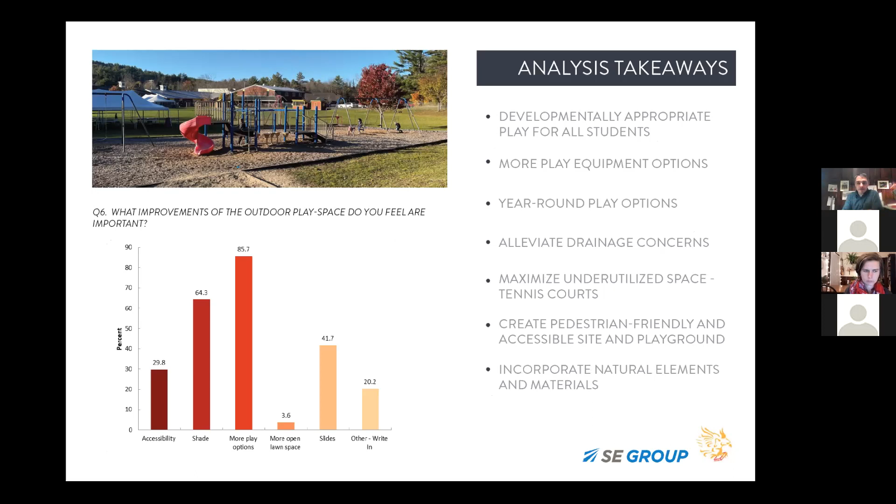As we started transitioning out of the analysis phase and thinking about the concepts and what sort of theme or story would organize the concepts on the site and really create some strong undertones, we started looking at what inspiration we could dig into.

This kind of classic valley and rolling hill landscape, of which Grantham sits at the base in a valley where the brooks and streams are flowing in between some hills. So we have this valley landscape as one inspiration piece.

And then the idea of all the hiking available within New Hampshire and even on the property with the trails, and the idea that hiking is very much about a journey and getting to a summit in many cases. And then even thinking about industry, how all the mills and the historic lumber industry in the town and area could lead to some of the form and materials that we see.

And then finally, within the valleys, the idea of open fields and rolling hills and ways to use that as an inspiration for some of the formation of the overall site design. So that's where we were drawing some of our inspiration from.

And then from there we say, all right, how can we translate that into a vision for what this play area and play space will be? And so we have the idea of modern organic forms, whether it's linear strong axes or softer curving formations, offsetting lawn areas with mounds and grasses, as well as the idea of using lots of wood.

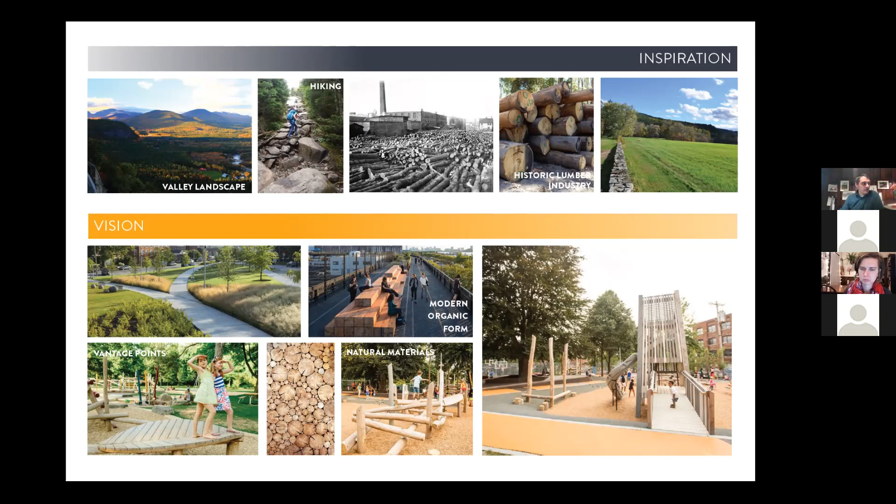When I switch slides, is there any delay, or are we keeping up pretty well? Looking at you, Elena. We're good. All right, I know the last time things lagged a little bit.

All right, so concept A. This is our first concept, and really the idea with this one, and you may remember that I touched on the idea of permaculture at the analysis,

is the idea that closer to the school is where you have more of your core intensive uses, and that as you get further away, the uses start to get less intense, and it's places you may not go to as frequently or for as important a reason.

And so the overall idea with this one is, all right, let's create this hive of activity. Really, as you're coming up Learning Drive and coming at the entry, using this tower piece in this upper playground as an icon of the entry into the school. So you see this tower right at the entrance to the school.

And so that becomes the foundation of this plan, where the various active playground play activities are located, basically in the cup of the school architecture. And given the way the sun comes up in the east and rotates around, all those are getting really good sun exposure.

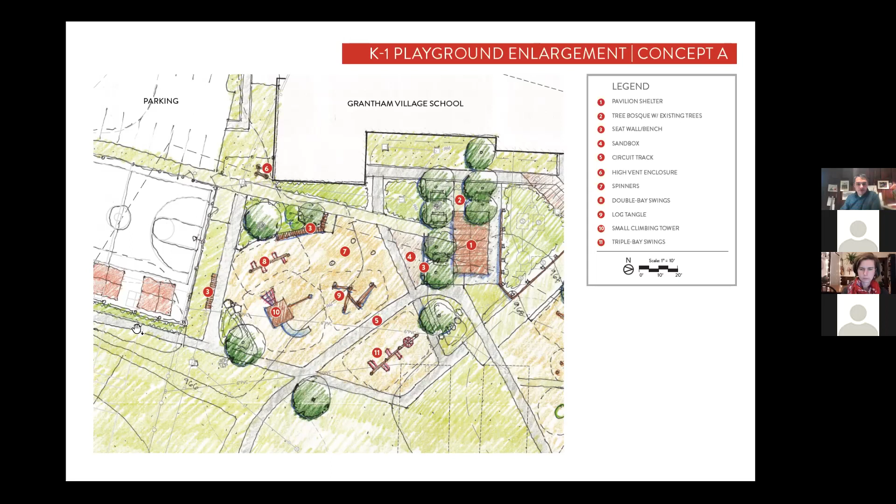So these are some representative images of the equipment that we're considering for that younger playground. The log tangle has some netting built in for climbing. This is the smaller climbing tower, the timber tower.

There's a few options for swings, a basket swing to be able to swing with friends as well as individual swings. There's also the accessible swings that you have now. We can continue with those.

And there's slides off of some of the small structures. And then of course, these options for spinning, ones where you can both sit and stand, and you really have to kind of crank this curving bar to get it to turn around, or this one that's actually designed to tilt off center so that every time you get to the peak, you speed back up again as you come around. Those are, I've tried it.

All right, so transitioning now to the upper playground. And in this one, it's kind of also divided by this walkway into two main sections.

So this one, again, this is the larger of the two timber towers. As I said, visible as you're coming and approaching the school. And even here, keeping the trees pushed to the edge so that as kids are on this bench, they have the view back at that timber tower, really highlighting it as a central feature and focal point for the school and for the kids.

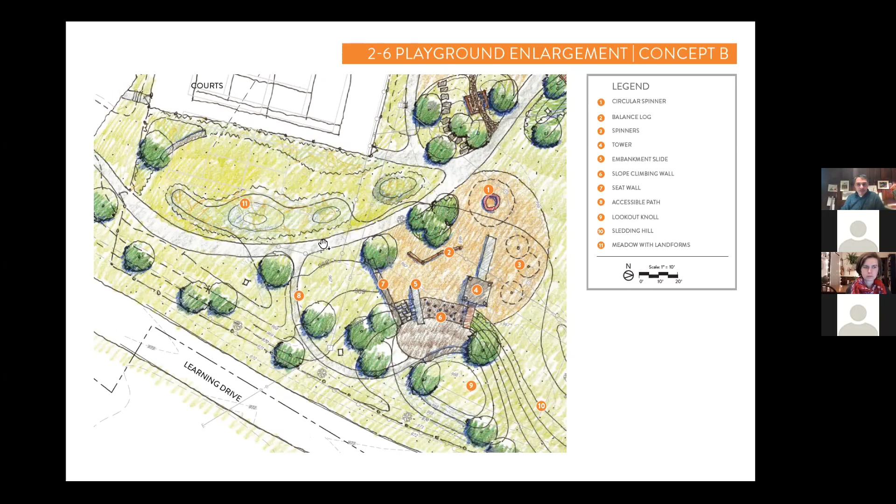This is the equipment for the larger play area. That's the big tower in the 2 to 6 play area. Massive slide coming out of that. Some balancing logs, again the spinning, the idea of climbing with some handholds up that slope. And then again that embankment slide coming down a slope with special surfacing on it to stabilize it.

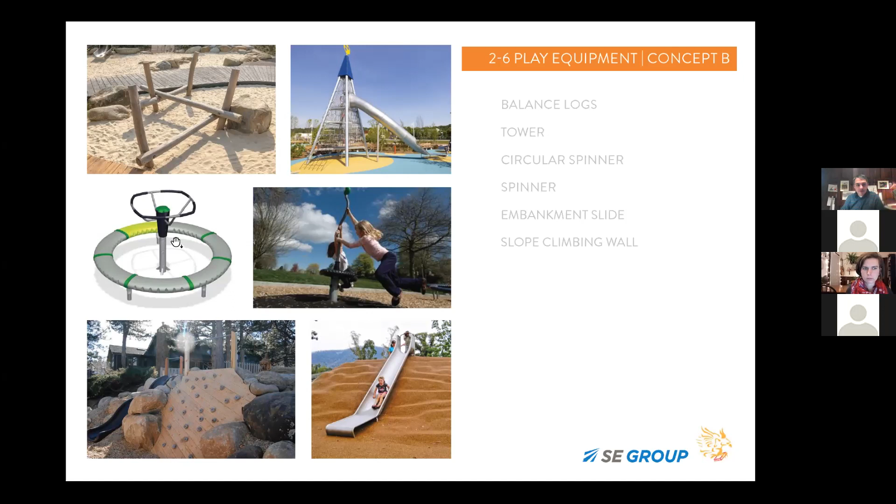And some more just about the overall site, again kind of from that passive landscape, trying to pull on that idea. The pathways running around, there's not as defined a track in this one, but certainly that linear curving walkway through the center of the site, kids will run back and forth along that, going from the school to whatever piece of equipment or play area they want to play on. And then looking at, are there opportunities for natural materials, for seat walls, and of course the pavilion as well.

So that is the end of the presentation of all the concept work.

It's a lot to review and digest, but at this point, if people want to come on and have questions or comments, ask me to go back to a specific slide, I can. I'm really just here to offer more explanation or review something again or answer your questions.

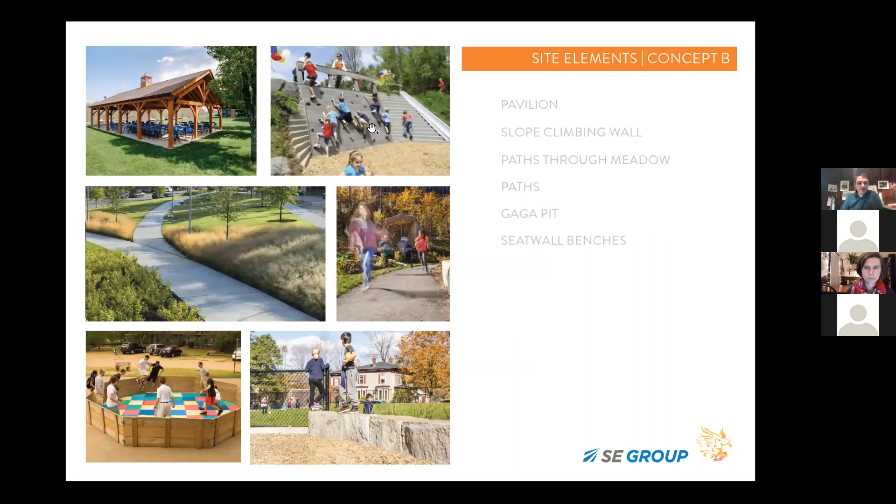Looks like we do have some comments I've kind of been ignoring as I go along, but we can certainly look at those. Yeah Tom, just from the Q&A, we have a parent with a question, concerned that the tube slides and larger slide could be abused by skateboarders in the summer. Is that a potential hazard?

I've not actually heard of that with these slides, mostly because I think once they get down, they're just going to fall once they hit the surfacing below. So it's not to say that they won't be crazy and try it, but it's not something that I've really ever had to experience with play equipment.

I guess the flip side of that is kids will always be crazy and try to do things they shouldn't. But is there a need for, we did talk about the idea of a skate park or a small BMX park, which Sydney, I think you had not liked that idea for this site, but trying to make sure they have an opportunity for something that will keep them entertained so they don't start going places they shouldn't and using equipment inappropriately.

The next question is, what about teachers' sight lines and keeping eyes on kids? Right, so that was one of the first questions we asked of the faculty, to make sure that they respond with their critique of how both of the play options meet that requirement. And so what we've tried to do in both schemes really is open the overall site up some more, although we're certainly starting to put some more elements sporadically through it.

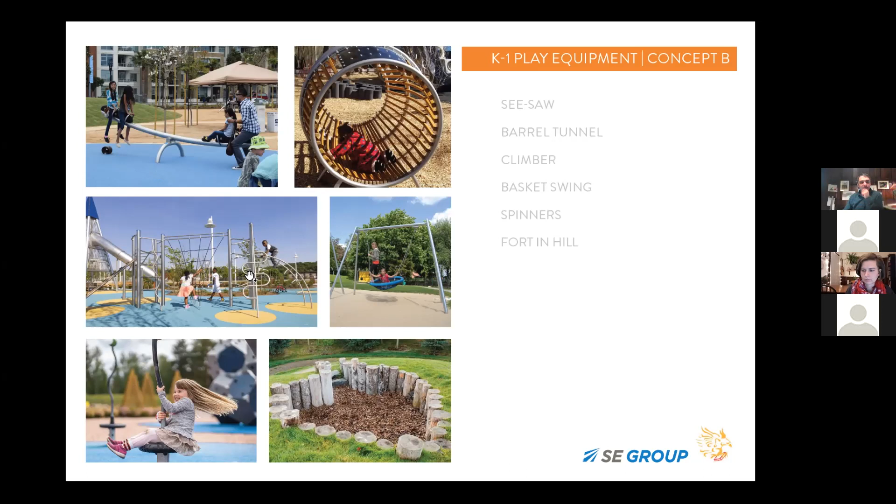And this is a question after my own heart, because this is what I was thinking all day. Both designs are amazing. Is it possible to have a Gaga pit in concept A? Are we able to mix and match elements of both concepts, or is it one or the other?

I'd love to be able to say, well, just choose A or B, right? But everyone always wants C. So the important aspect of this meeting tonight, and a follow-up with the refined project committee tomorrow, is to say, all right, what's the core design we want to start with, and is there something missing from one or the other that we need to pull in?

I did not show the Gaga pit in option A, although we know how important it is. But one thought was, could it go on the courts as an option? And if that takes up space, we had a decent discussion with the faculty about whether there's another spot, playing off the geometry, where maybe the sidewalk continues over and you end up having enough space in this corner where you can add the Gaga pit on its own concrete or asphalt pad, or even gravel, and incorporate that into the plan.

So that's certainly a yes. Gaga pits get so much use, there's such high energy activity, and they're so simple to construct, right? It really is worth incorporating it in somewhere.

And if you want to pull elements from one to the other, we also had a discussion about the big hill in B. What happens if we like A, but we want this big hill here, right? So certainly you could, it takes a bigger bite out of this field, but then are you going to just have the slides, as I also have in A, and not have any play equipment because you still want to go back to A.

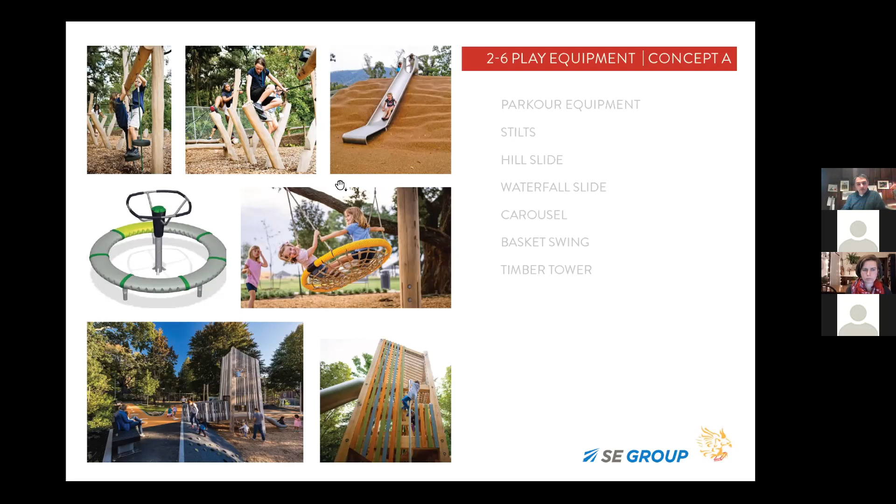We could look at that path as a way to kind of simplify the wear and tear at some of those critical access points. But for the most part, we're looking most likely just from a cost standpoint at the fiber reinforced mulch, and then also having discussions. Elena was talking to several reps today about the issue of drainage and freeze thaw relative to both the wood mulch and the rubber. So that's still a bit of a work in progress, but that's the direction we're leaning.

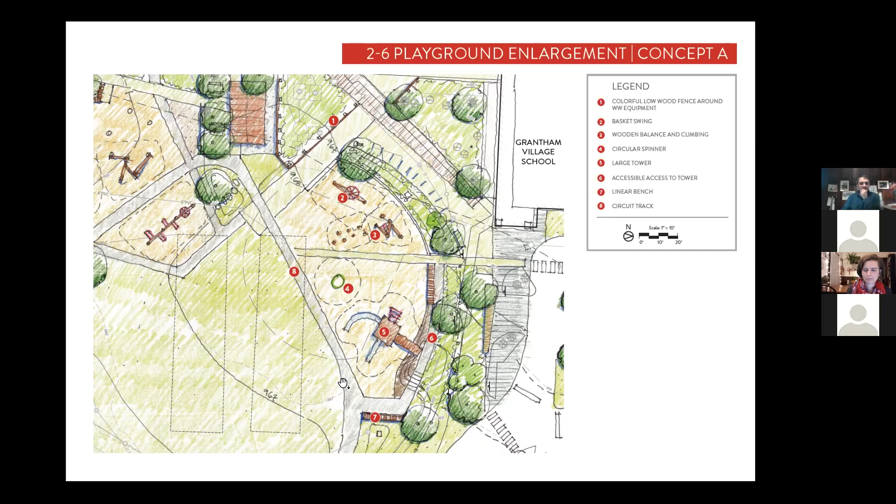So it looks like our Q&A and our chat have slowed down. I don't see anything currently. I'd be curious just to hear from our parents who are on. The talk in the school a little bit with the kids today was, do you like A, do you like B, I don't know. I know there's a survey coming, but if you have any first impressions, this would be a great time to share them if you like. Or which parts do you want to mix and match?

Okay, we have such fantastic designs. Thank you. A few thoughts. One, the option to have both a gym class and a recess group out at the same time seems like a huge win. Two, love how you're incorporating the natural hillside for sledding. I like how A has a sidewalk for access where it seems like B didn't, but the height and dominance of the big kid structure in B seems great. Four, I love the big hill in B, but overall like the layout of A. Five, extending the entry area with a covered waiting area seems great. And six, I like the pavilion placement more in A with the clear, direct, wider walkway towards the play areas. Awesome.

Sounds like we're starting to build some consensus for a really big hill down here. I think the discussion of access, if I understand correctly, there is an accessible walkway that gets you to the top of the hill, coming off the track in this scheme here. And then if we look at B, it comes around the other side. You have this walkway, which starts here and starts to curve its way up over here. So both of them have accessibility up to the top of that landform.

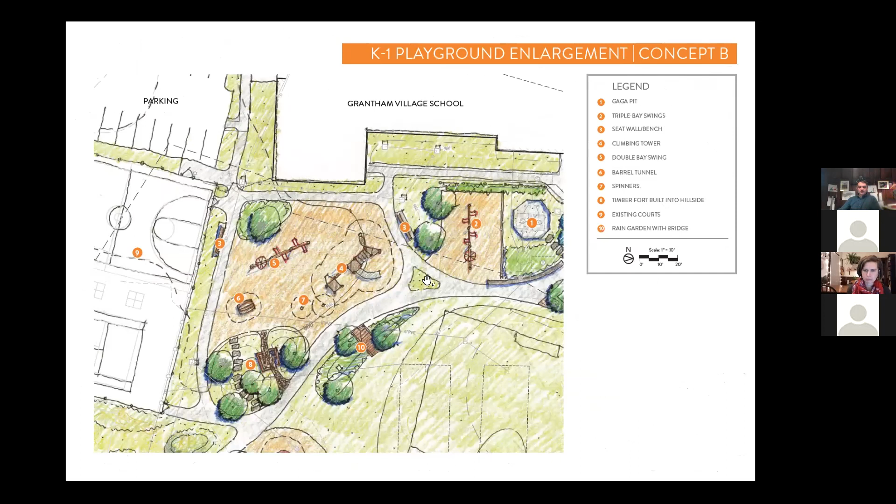In that elementary school I did in Montpelier, they had kind of a similar big oval—this one's clearly much larger than they have—but they like to line their whole class up on the oval, with the teacher in the middle talking to them. So there's creative ways to look at the site design and layout and think about ways you could gather the groups together, both for meetings as well as that outdoor learning.

There's a comment in the chat coming in: I love that there's something for everyone. It's hard to accommodate K through 6 as their interests and abilities are different. I love the nature incorporated—it's kind of an extension into the woods, and we visit there frequently.

And then another comment: I like the layout of B with the concepts from A. Love to hear from whoever asked that to elaborate a bit more. If that's your comment, if you're willing to elaborate, or if it's easier for anybody on the call to speak, I can always bring you in to speak at any time. Maybe that's easier for an elaboration, if you're willing.

So I'll check with that person. I'll read the next Q&A.

I'm drawn to concept A. However, I worry about extending the walkways and taking some of the parking. The car lines and parking issues get backed up a lot, and I can't imagine losing that space.

And then the next comment is: I also love the idea of the racetrack/walkway in concept A. I think it's a great way to encourage kids to even just walk or do laps during recess. Wondering too if it could also be used for their mile run in the gym.

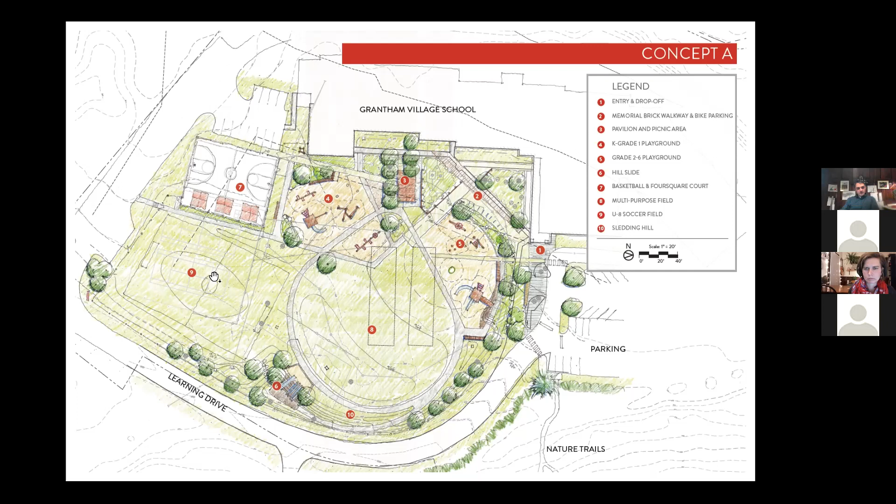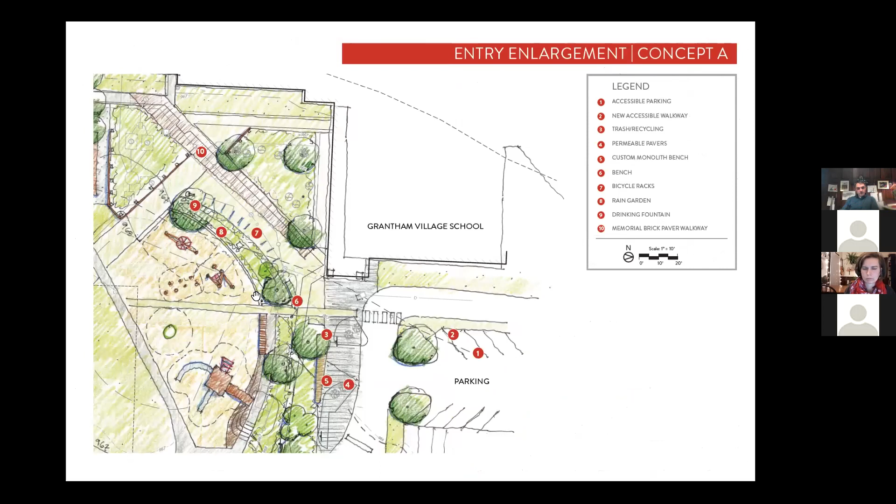The alternative with B is that you keep one of the tennis courts, but you gain a bit more space for the playground still, and do some more interesting landform and site design here. But really the reality is that the existing tennis courts are there - in both schemes, you can almost do everything that's here without even affecting the tennis courts. The circulation here, we could certainly relook at it - if you were even going to keep both, you could still get it all to function for the most part in the same manner.

But that question about do we at least have one court for the school's use, for the town's use, and are we gaining enough to get rid of one or two?

I definitely think how tight and enclosed this end is, and this little sliver through here between the existing fence - between the fence of the tennis court and the edge of the playground - it's such an unusable space, right? And even just by opening this up a little bit more, I feel like it helps a lot with the scale of the overall space.

It seems like we should definitely at least consider getting rid of one. The question becomes, depending on this layout A versus layout B question, is this enough field space - that helps determine if we keep the one and have more of a minor addition of the play area over here versus the larger field.

Next comment in chat is: I agree with the wood elements. It blends in with the environment and plays on the history of our community. It helps with enriching creativity and finding natural play spaces in their daily lives.